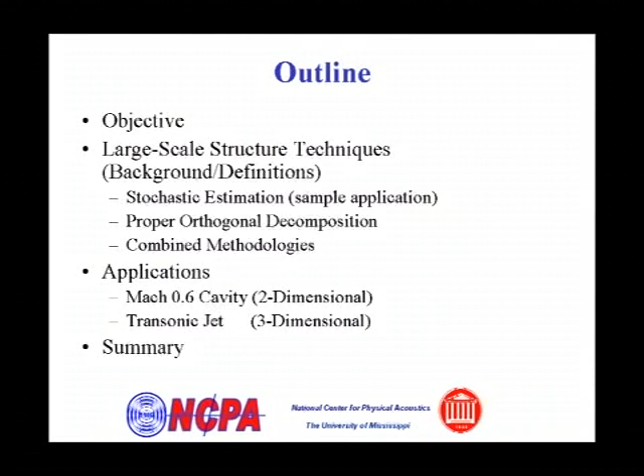We've seen from Dr. Lele's talk and Dr. Morris's talk some of the things we can get from computation: the full field, unsteady flow dynamics. What my group is trying to do is develop tools where we can get this time-dependent phenomena from full field experimental techniques.

One could use numerical simulations to try to get the unsteady phenomena, and they've been very successful at that. From the experimental side, there's been recent development - Yulu's done a lot of work in this, and Moore and Louise as well - with time-dependent experimental techniques. However, they're still very much in their infancy.

To actually get three-dimensional experimental techniques, they just don't exist. The planar techniques are something like 2 kilohertz, maybe 4 kilohertz, and when one starts to get into high-speed flows, that's not time resolved. It might as well be 10 hertz if you're only going 4 kilohertz, because it's just not fast enough.

So what we've been developing is low-dimensional techniques. One can conventionally think of low-dimensional techniques in at least two ways: models. By a model, what I mean is you typically use some type of experiment or knowledge-based empirical data set or empirical basis set.

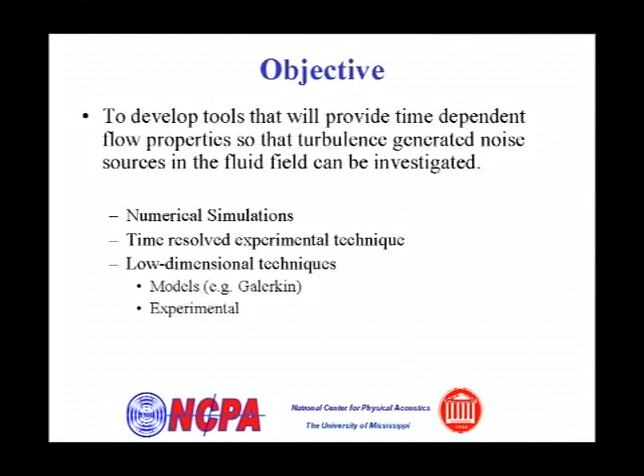From the experimental point of view, what we're trying to do is take a couple of locations in the flow field and use the information from that to predict what's going on for the full flow field.

To give you a cartoon example, I'm going to lean heavily on the cavity example. Let's say these blue lines down here represent where I'm able to sample the surface pressure on the bottom of the cavity. These red lines right here might represent when I get my PIV data, and it's effectively a random snapshot.

What I want to try to do is, from the few locations where I get this temporally resolved information, estimate what's going on in the rest of the flow field. Basically we need to fill in the gaps, and the technique I've chosen to use is stochastically estimating the full velocity field from the surface pressure.

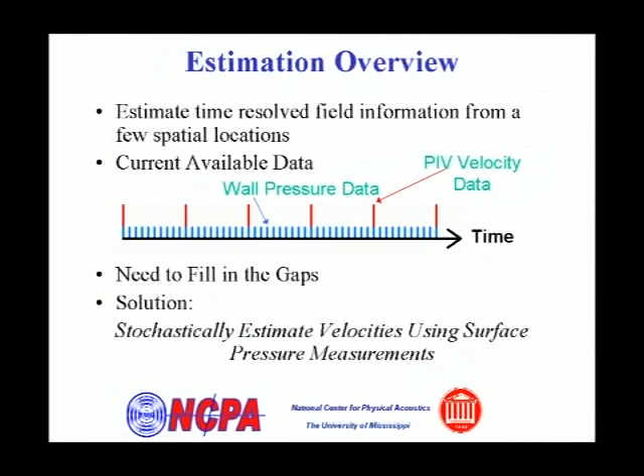Stochastic estimation is just a conditional average, and originally it was written in terms of just the velocity field. However, what we've reformulated - this U tilde is the estimated velocity field - we want to estimate it knowing information about how the surface pressure P relates to the velocity.

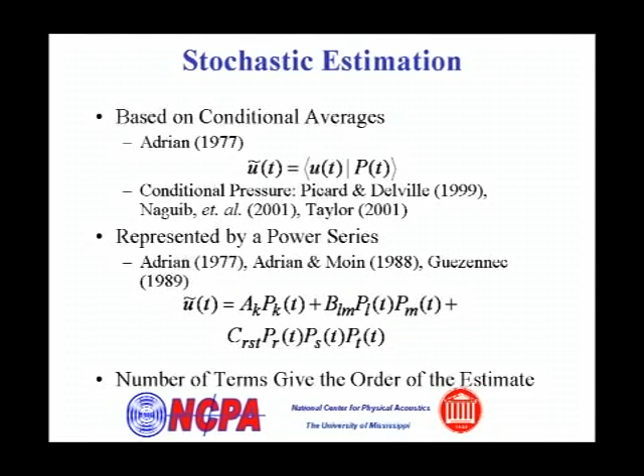Since the late 90s, there's been work where instead of using information about the velocity, we use information about the pressure to represent that. Going through the expansion, you come up with an equation where one could look at linear estimates, quadratic estimates, and higher nonlinear estimates.

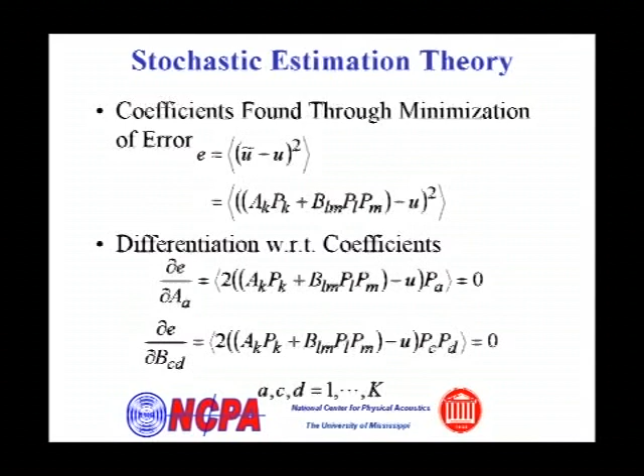When you go through this, it's just a minimization process to get the coefficients. Basically what one's trying to do is solve this equation. These coefficients, AK and BLM, are determined by a priori information, statistical information, about how the surface pressure relates to the velocity field.

When one goes through that, one solves for these coefficients, and they have information about how the pressure field relates to the velocity, as well as how the pressure measurements relate to each other.

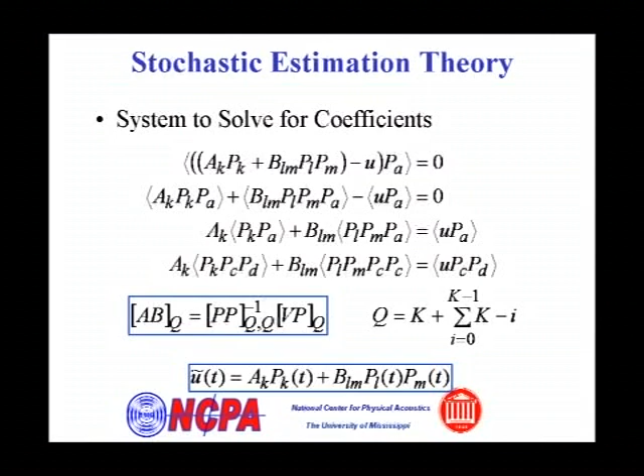So one can pose many questions, but the first ones we wanted to look at were: how many pressure sensors are needed to estimate this and beat a non-uniqueness problem, where should the measurements be depending on the phenomena and how well it correlates with surface pressure measurements, do you need to use that first nonlinear quadratic term to do the estimate, and how well does the estimate work?

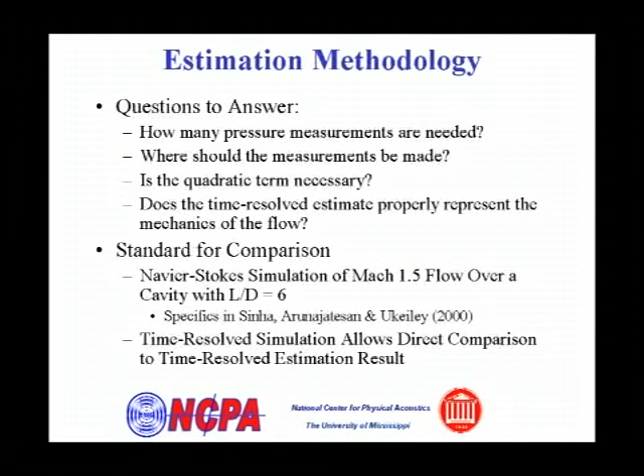For a standard of comparison, the guys at Craft, Raj, who's not here, and Srini Arunajatesan, gave us access to a Mach 1.5 flow, an L over D of 6 cavity under a Mach 1.5 flow. This allows us to evaluate the technique using a numerical simulation, since we have time-resolved information and can see how well the technique worked before evaluating experimental data sets where we can't get it.

My student went through an extensive data set trying to figure out where one should measure the pressure along the bottom to best estimate the vorticity field. After about a year, we determined that evenly spaced points across the bottom are the best.

The other thing the quadratic term does, which I didn't point out before, is that when one looks at the reconstruction of the mean turbulent properties, including that quadratic term gives better estimates of the velocity field far away from where you're estimating. The inflow conditions, in terms of turbulence properties, were not predicted well by a linear estimate—you actually had to go to the quadratic estimate to get that.

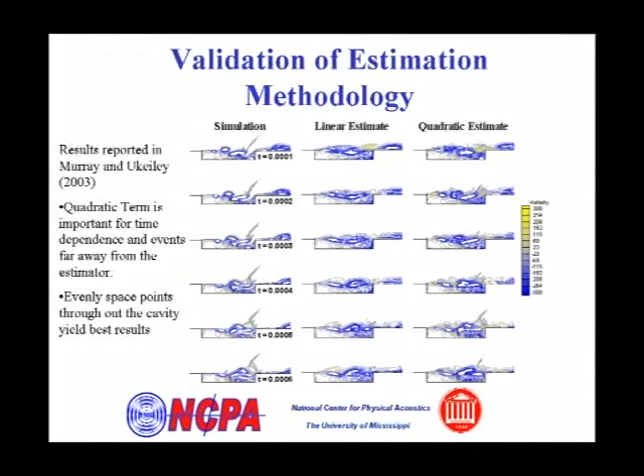Okay, so that's one way of estimating it. It still gives you too much information, and Phil alluded to this—when you have this huge database, what do you want to look at in it?

So now what we're proposing is to combine this estimation procedure with the proper orthogonal decomposition, introduced by Lumley. Basically one solves this integral eigenvalue problem, where you have some two-point statistics of the flow field as the kernel for this Fredholm equation, and what you get out are lambdas and phis, where the lambdas are the weights of the individual modes you're decomposing into, and the phis represent the structure of the flow field—these are the orthogonal basis set of the flow field.

One nice thing, since the two-point statistics follow certain properties, is that one can reconstruct the instantaneous velocity field, or whatever field you're decomposing, as the summation of expansion coefficients times the orthogonal basis set, where the expansion coefficients are found by integrating over the whole domain the POD is applied to. It's these expansion coefficients which carry all the time dependence of the flow field—they are the weighting functions, or building blocks, while the basis set carries the spatial information.

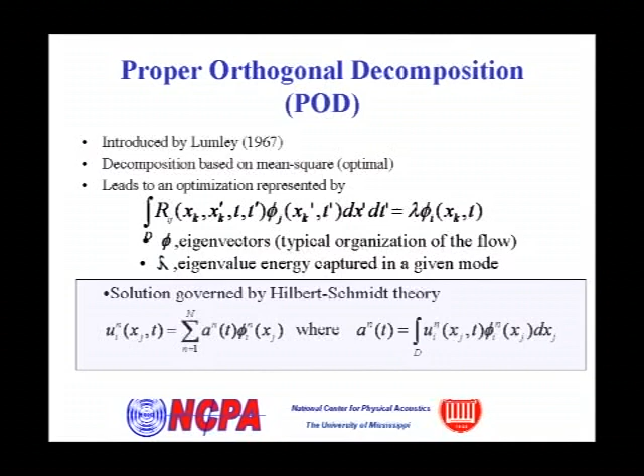So when you combine the two techniques, what we're going to try to do is estimate the time dependence of these POD expansion coefficients, writing it in a similar formula to the one I had for stochastic estimation, using information about how the pressure relates to these expansion coefficients.

You expand it out and solve for the coefficients, and basically we can reconstruct the velocity field in these cases as a function of POD modes and the time dependence.

I should point out the difference between these two techniques. When you apply the stochastic estimation directly, you're actually solving for the velocity at each grid point independently. So you come up with a set of coefficients for your stochastic estimation expansion for each grid point. It's quite an intensive property, and you could locally do good in one place and not do good in another because it's all based on how the correlations work.

Here what we're doing is correlating the surface pressure with this expansion coefficient, which again is an integral property of the whole flow field. So we're only calculating a set of coefficients for each of the given POD modes here, which is effectively what it says there.

Now to talk about the experiments that were conducted: they were done in our 2-inch facility at the University of Mississippi. Jack presented the facility a little bit earlier. Basically what we can do is screw off our nozzle system and screw on this 2-inch flow duct. It has glass on 3 sides, so we can look in from the two sides, and the laser sheet comes in from the top. I'll show that in a second. The nozzle blocks are interchangeable, so we can run supersonic conditions.

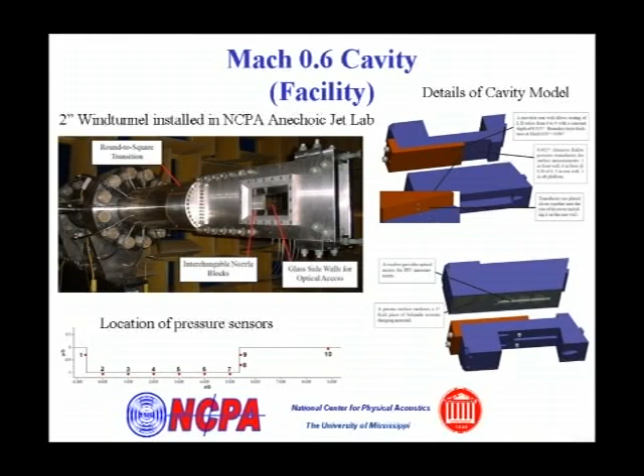This is a solid model of the cavity. The pressure sensors are embedded at these locations going across the cavity, so we had 10 pressure transducers in there. One thing you always have to be extremely careful about with cavities in small experimental facilities is resonance, so we actually had to build a flow liner for the top surface of the wind tunnel. It's very easy in cavity flows to set up a resonance in your wind tunnel, and many people end up studying the resonance of the wind tunnel instead of the modes of the cavity.

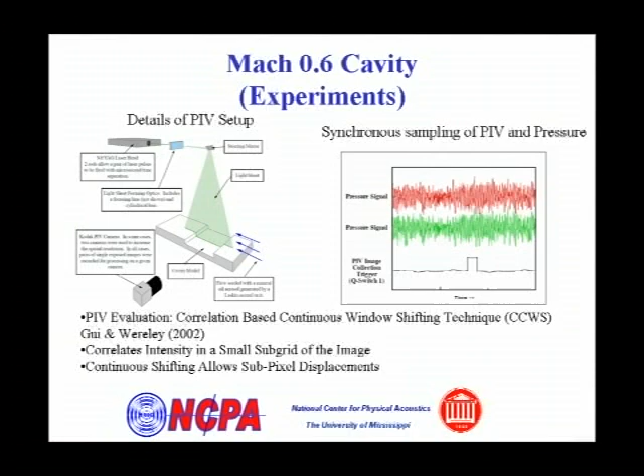Just details of the PIV setup: we're using a Nd:YAG laser, coming in through the top, shining just slightly offset of the pressure transducers. We really didn't want to blast them with the laser. As we digitized the pressure signal, we were also digitizing the laser signal, so we could line up in time the exact moment the laser was firing, allowing us to correlate the velocity and the pressure.

So just in general, since nobody's talked about cavities yet: basically we have an inflow condition, an inflow boundary layer, and some free stream, which for this case is Mach 0.6. We have the shear layer growing, and it interacts with the aft wall, which under given conditions—a function of Mach number, length to depth ratio, incoming boundary layer to depth ratio, momentum thickness, volume, temperature—can set up this resonant phenomena. One can go back to Rossiter's work to predict the resonant tones, and these are effectively the relevant parameters to study.

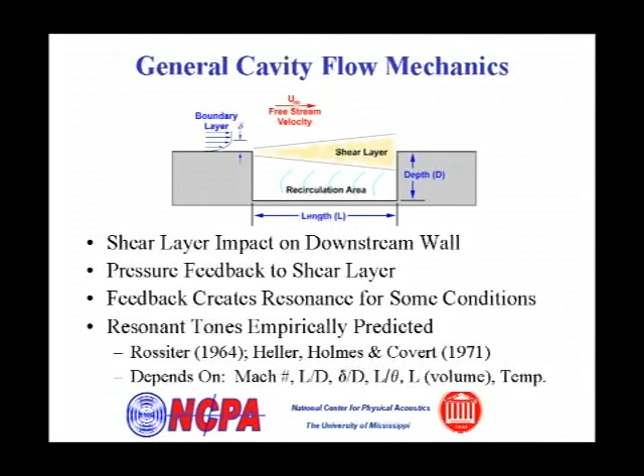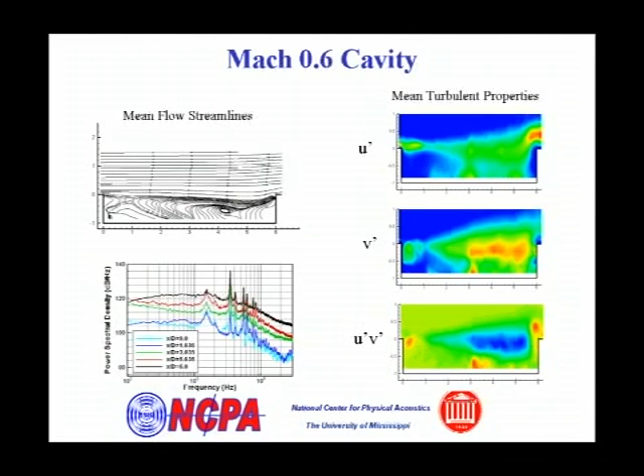The first mode, or the dominant mode, is optimal in the mean square sense, meaning its convergence is the most rapid in terms of mean square, or here in terms of turbulent kinetic energy, that one can decompose the flow into. So like I said, there's about 13% in the first mode, and about 90% of the energy within the first 20% of the modes.

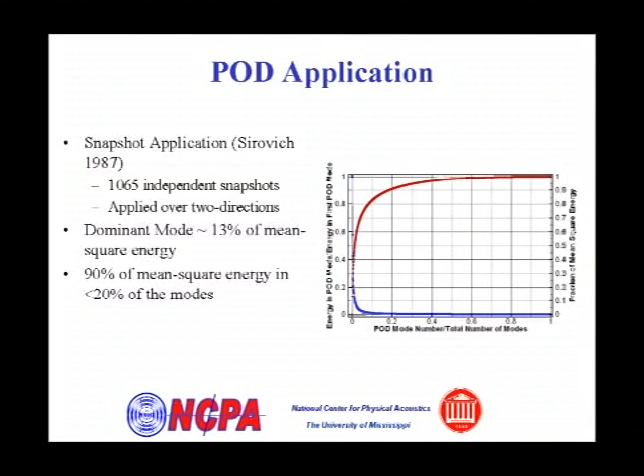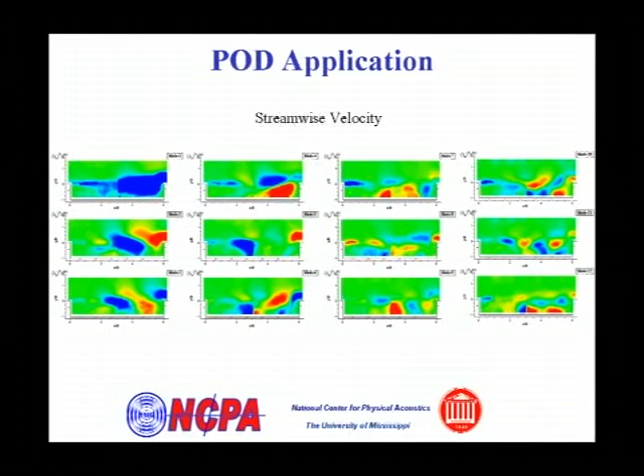It's a little more intuitive to look at the wall normal velocity modes. If you think about vortical structures across there, one would expect some type of change in sign in the wall normal velocity as you cross one of those structures. The first mode is a lot what's happening on the aft wall. If you look at the second, third, and fourth modes, there's basically some type of double structure in there, which might be associated with a second Rossiter mode, where you'd expect to see two structures. When you look at 6, 7, and 8, they tend to be more associated with three structures, which might be a third Rossiter mode.

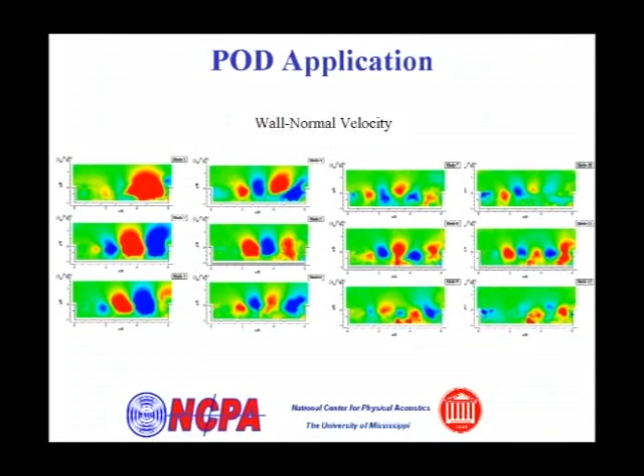So the POD modes are actually fairly representative of the vortical structure one might expect to find in that flow field. This is just showing you the correlations that are used to extract the coefficient.

And if you actually take the angles of these and look at them in terms of convection velocity, it's nominally 0.6 of the free stream velocity. So it is representative of the convection that one would expect of the structures going through there.

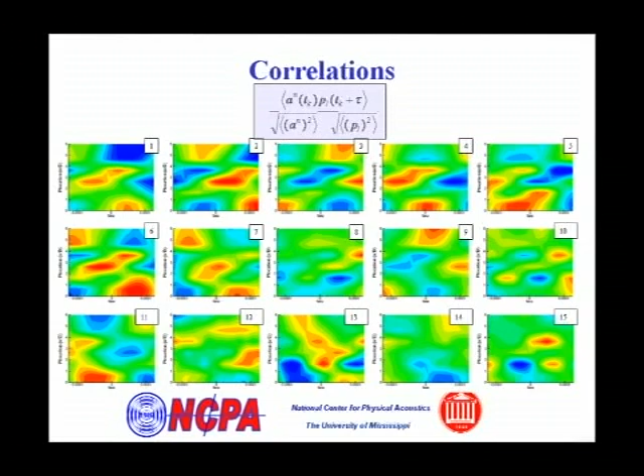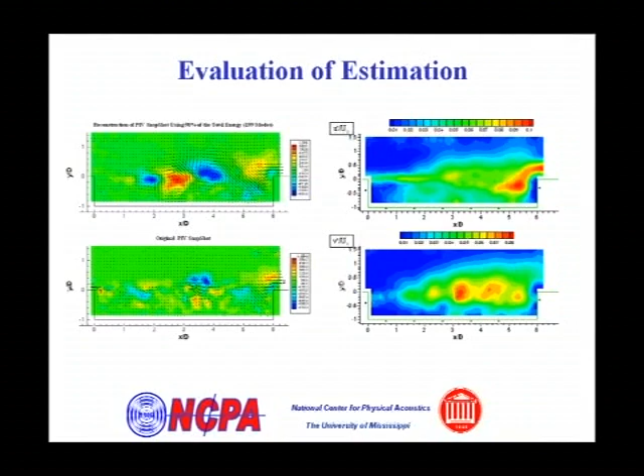But if you look at the instantaneous velocity field, there are features in it you can see that you predict very well. You have this large outflow here, which is predicted outflow here. This is just some random snapshot that we chose. There's this large inflow here, or downflow there. You get many of the features, although the amplitudes are a little bit under predicted.

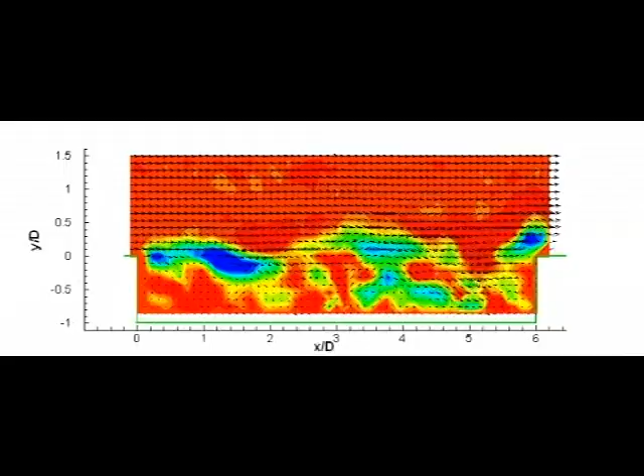So if we try and look at an animation, this is now resolved at 30 kilohertz, the rate at which we were resolving the pressure signatures. The color contours are span-wise vorticity, and you can see the velocity vectors, and this is using 90% of the energy. So we're using a lot of modes here, so one would expect there to be a lot of complicated phenomena in there. And you see some evidence of certain features.

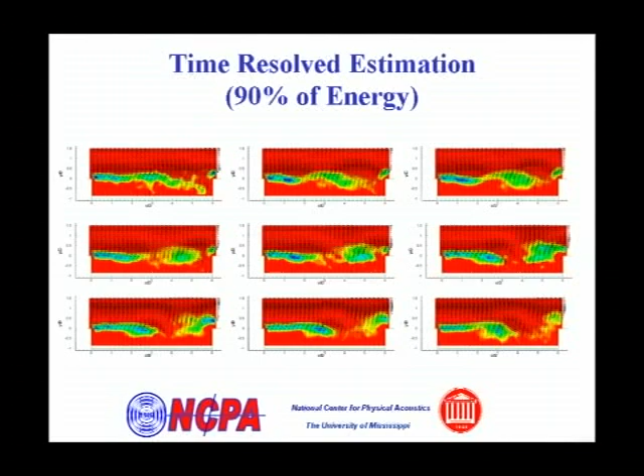Now, if you recall, when I talked about that second, third, and fourth POD mode, they were very representative of what I was saying, the second Rossiter mode. So if I just do a reconstruction using these, one sees phenomena associated with that.

You see the roll up, you see the structure being convected down, and the second one being structured down. This gives me a way of actually looking at the velocity field associated with the second Rossiter mode. These black symbols down here represent the pressure signatures which I'm using to estimate the rest of the velocity field.

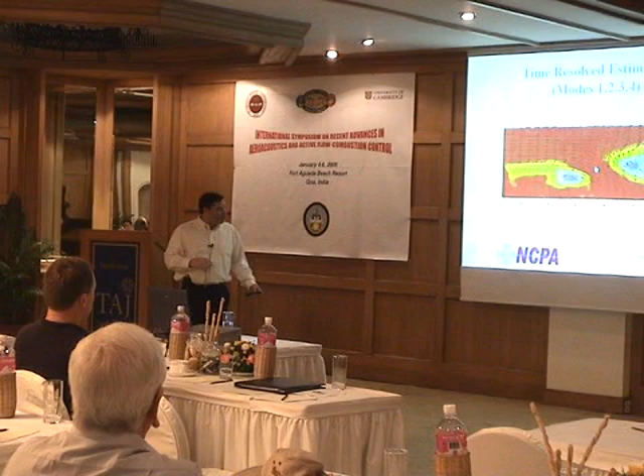If you remember from the first one, I had two more down here, but as experiments go, those are the two that would go first. Okay, so just pulling out some of the time-dependent data.

Again, the flow going, or the time going this way at 30 kilohertz. Two things that you see here that are very interesting: you do see this interaction of the vorticity of this vortical structure with the aft wall. You also see the mean flow coming in and crashing into the aft wall.

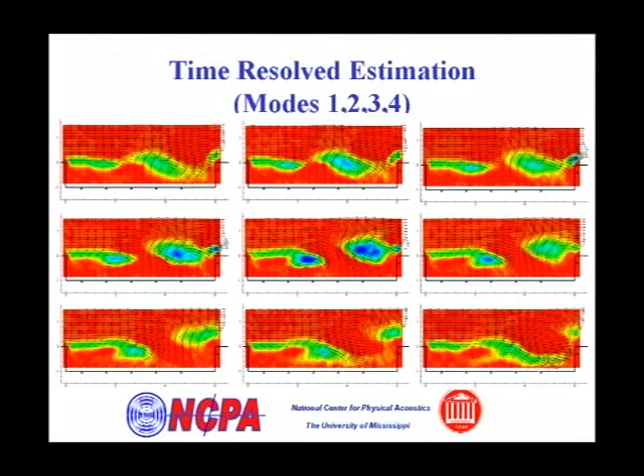If you go back in the cavity literature, there is at least some discrepancy over whether it's actually the vortical structure interacting with the aft wall that sets up the resonance, or whether it's actually the force associated with the mean flow streamlines coming down and interacting with the aft wall. We can try to study that using a technique like this.

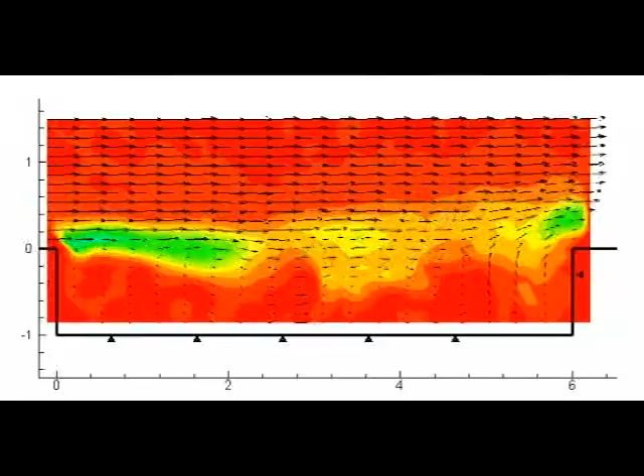This is using higher order modes, 6, 7, and 8. Here you see phenomena associated with a lot more, possibly 3 structures across there. As you get into the higher POD modes, things tend to get a little messier. But this technique allows us to decompose the flow and look at the time dependence of different phenomena.

Okay, so I'm going to completely change modes and talk about another application of a very similar technique, which we've been doing in an anechoic jet facility. This was done with Mark Glauser and Charles Tinney at Syracuse University.

In this facility, we have a PIV system set up where we're taking cross-plane measurements, so the flow is coming through the plane of the PIV measurements. We're measuring the far field simultaneously, as well as some lip pressure, or pressure near the lip.

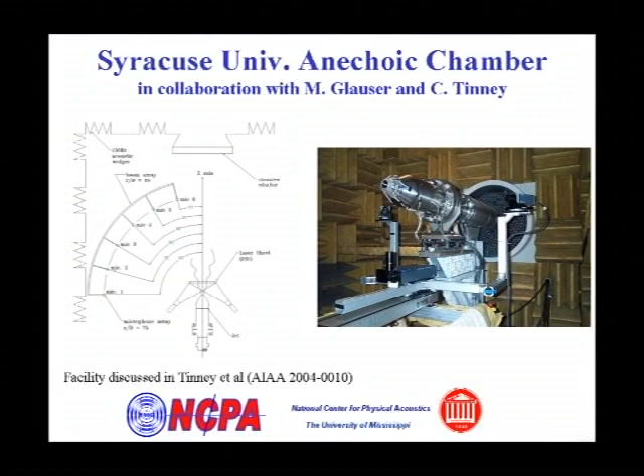So to give you a better idea of what we're doing here: we have 15 pressure transducers azimuthally. They're about 1 diameter downstream and about 1 diameter away from the edge of the shear layer at that point. We're sampling those simultaneously.

We built up a database of the PIV snapshots throughout the sound producing region, from 3 to 8 diameters downstream at about quarter diameter increments. The PIV and the near field pressure are sampled simultaneously, and then we perform this estimation to get pictures of the whole time dependence of this volume of flow field between 3 and 8 diameters downstream.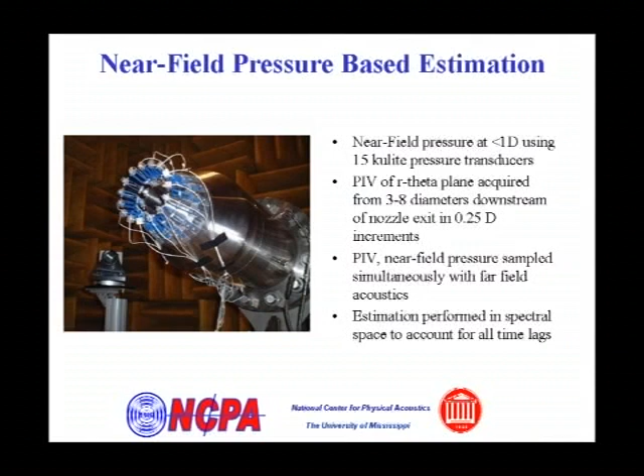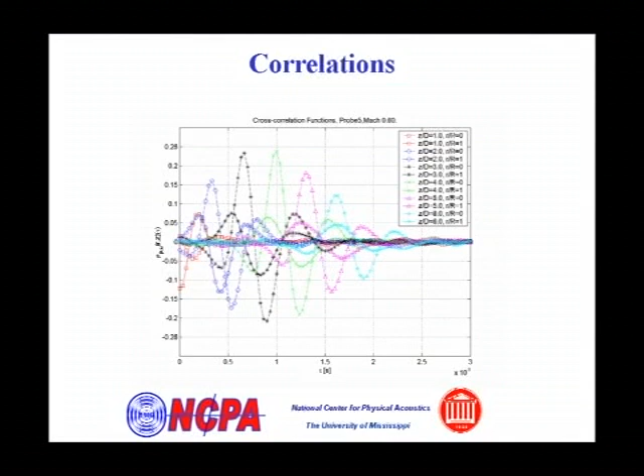Some of the things you can see: definitely before the end of the potential core, you see this much richer azimuthal structure, a flow dominated by perhaps azimuthal mode 5 or mode 6. As the potential core closes out, the flow actually becomes dominated by a much lower azimuthal mode number, 2.

This is stuff that's been seen in subsonic jets, and it's still dominant. This evolution of the azimuthal, the dominant azimuthal structure evolves, and so where we really want to go with this is to actually, now we have a data set.

We have a time-dependent data set of this volume of flow field. I didn't point this out, but it's a Reynolds number of about 1 million jet. So it's a 2-inch nozzle running at Mach 0.85.

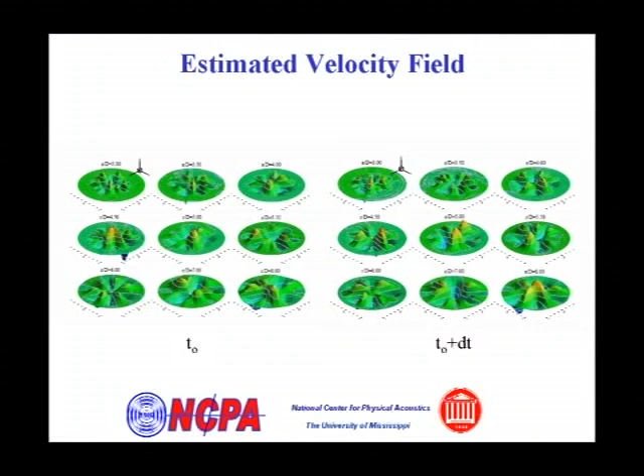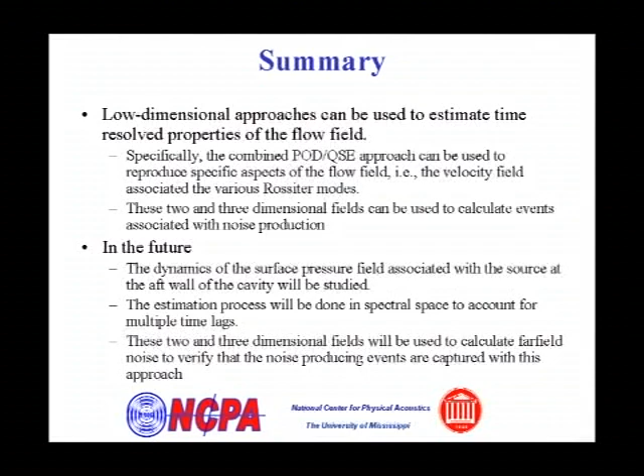It was not clear, the PIV data that you took, what is the rep rate on that? The rep rate is roughly 10 hertz. But your calculations are 30 kilohertz. My calculations are 30 kilohertz, which is the resolution of the pressure transducers. So the only thing the PIV gives me is statistical information about how the pressure relates to the velocity field.

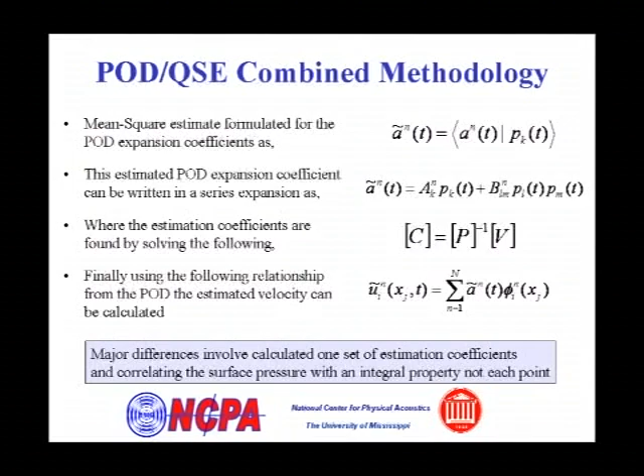So when I go back into, for example, the PIV is used to calculate these coefficients. And then when I solve this equation, these coefficients get plugged in. My time dependence only comes from the pressure terms. So you're using the time information in the PIV? I'm not using it. The PIV is simply used to tell me how the pressure relates to the velocity field in a statistical sense. So I was a little bit confused on the frequencies.